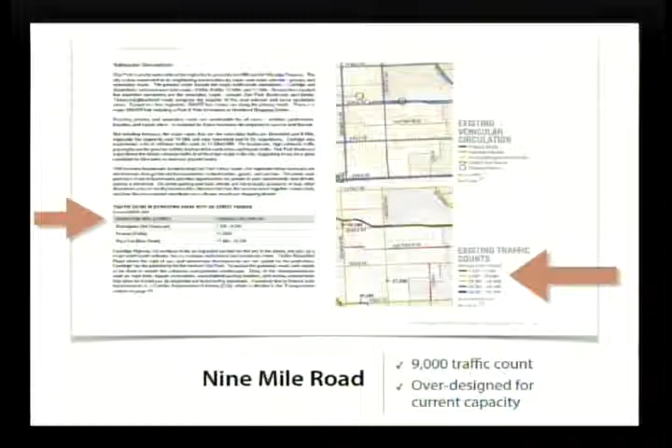So we talked a lot on the first evening about the principles of new urbanism and how you design a more democratic allocation of that public space, by bringing bikes and people in more, creating more space for stormwater and nature, and that seemed to resonate with people.

So our recommendations then, I'm going to go through some of them and then hand it over to Ken. First, in order to understand the recommendations, we felt we needed to understand the different character areas of 9 Mile. From the end, from Greenfield to the western edge at Ferndale, we identified 5 distinctly different character areas. It's even more complicated a little bit because in some areas there will be one character area on the north and another character area on the south, and each of these demands some unique solutions.

So let me just go through the 5 areas one by one and what our recommendations are for those. In character area 1, which both predominates at the eastern and western ends of 9 Mile and is the largest single character area of 9 Mile, it's mostly single-family residences facing the street.

They can be attached. Many of those are duplexes, and some are 2-story buildings. They have driveways that open onto 9 Mile, so there's potentially a lot of conflicts that could occur between cyclists and drivers coming in and out of the driveways. So we're very mindful of that as we're designing the bike facility.

An example of this character area number 1 is the area between Radcliffe and Church. Here you can see on the north side some of the driveways, and the character is predominantly residential facing 9 Mile.

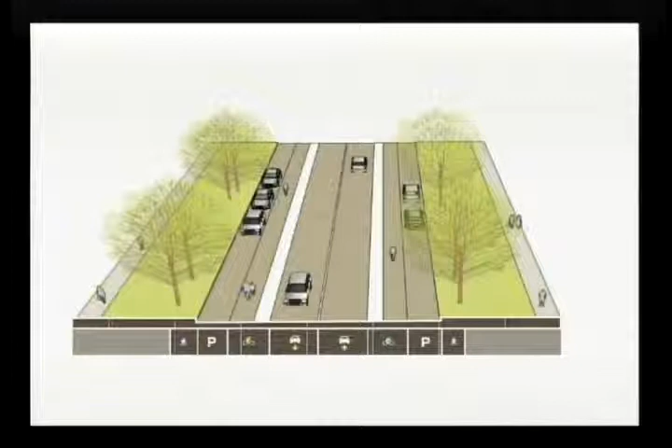This is one option, and another option would be to not have the on-street parking, but rather have a green median instead. These are two very different options - one would be much more residential, perhaps more park-like and pastoral, whereas the other would provide needed on-street parking for the residences. So we leave you with these two options to consider.

Character area number 2 has strip shopping centers on one side of the street, occurring more on the north side. These are low 1-story buildings, very viable retail buildings. Most have alleys and service access at the rear. They're very similar to buildings in Ferndale in terms of depth, vintage, and stock construction type, so there's really nothing preventing these from becoming very viable retail in the future.

But retail usually needs on-street parking to make it viable, so we looked closely at how that could be accommodated in these areas along with the bike lane. A typical character area number 2 would be Rosewood to Republic at the eastern end of 9 Mile. Here's an example of that 1-story retail and the parking.

We noticed that in some areas parking had been carved out from the curb and back, but our plans did not rely on that technique to get on-street parking. We were trying to find a way to get on-street parking within the curb-to-curb area. Here's another area where quite a bit of these businesses have on-site parking, but not all of them do.

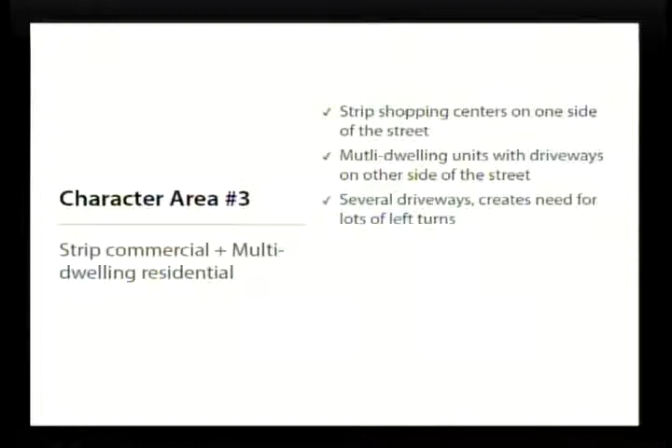In character area number 3, we have strip commercial and multi-dwelling residential. This is kind of a combination of the residential that might need visitor parking and the strip shopping centers that need parking to become more viable. There are a lot of driveways in this area, which creates a need for a lot of left turns, so I want to plant the idea that the median can be very useful for allowing left turns into driveways. The trade-offs become a little bit more complicated.

An example here at the eastern edge of 9 Mile where that multi-dwelling residential and strip commercial exist side by side. Some of that residential on the left could benefit from on-street parking, and some of the strip commercial further down could benefit from on-street parking. But as we pointed out earlier, if you did that, you would need to do away with the median. The planted median makes it easier for cars to turn into a driveway.

Here's an example of some of the commercial that has parking in front. I want to point out again the alleys at the rear, which make it easier for these businesses to get services, garbage, and deliveries off the alley. That is really great for commercial of this type.

Another character area was where the linear park exists, or what people called the linear park. During the public workshop, someone said this would be a great area for a dog walking park. So we've looked at this as a location where the buffered bike lane, rather than being on the street, could actually be incorporated along with the path. The path would be made wider, a multi-use path with pedestrians and bicyclists using it together in both directions, possibly.

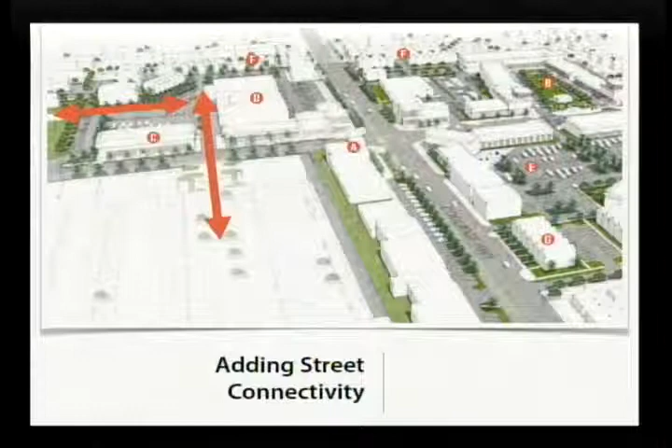We took this idea a little further and looked at what would happen if you had that new street coming down at Ridgedale. This drawing shows this new section between Ridgedale and Coolidge Highway on the right, Ridgedale on the left, and how you might be able to create public space in the middle of the street by pushing the buffered bike lane and the on-street parking to the edge.

You'd still have a very adequate sidewalk. This is designed with a 15-foot sidewalk, and the buffered bike lane and the on-street parking, and it has a left turn lane. But the area between the left turn lanes is about a 38-foot wide spot for a range of uses that might include rainwater gardens, public plaza, pocket park.

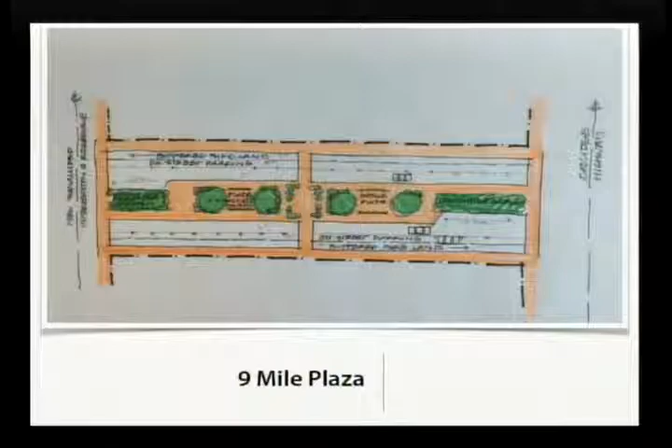This could be a place where community gatherings occurred. And we looked at some examples around the country where similar things are being done.

One great example is Lancaster Boulevard in California. You can see how this street was transformed to one lane in each direction. They use the space off to the left, what would be the equivalent of the plaza space that we're proposing, part of the time for diagonal parking, and the rest of the time for festivals, weekends, and evenings. So it's a multi-use space, a very creative use of space.

Now I'm going to hand it over to Ken, and he's going to talk more about specific street design from the engineer's perspective.

Thank you, Marcy. My name is Ken Voigt, a traffic engineer working on this project with Marcy. A lot of the concepts we talked about require some engineering detail to check their feasibility and safety, and I'd like to talk about it. There are some documents showing the latest state-of-the-art in street design for urban areas, to create great places and still accommodate pedestrians, bicycles, people and cars.

One of the things Marcy mentioned for Coolidge and 9 Mile is the possibility of a roundabout. I've heard lots of concerns about roundabouts, and I'm not quite sure why—I understand it happens if it's new to you, but there's a lot to be said for roundabouts. I want to spend a little time explaining why they are so effective and such a great asset to a community.

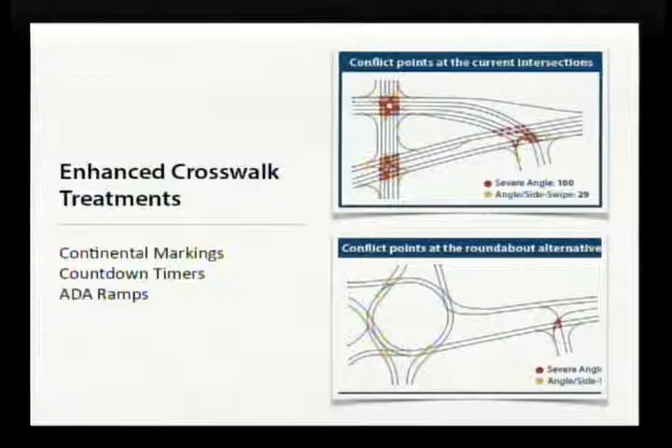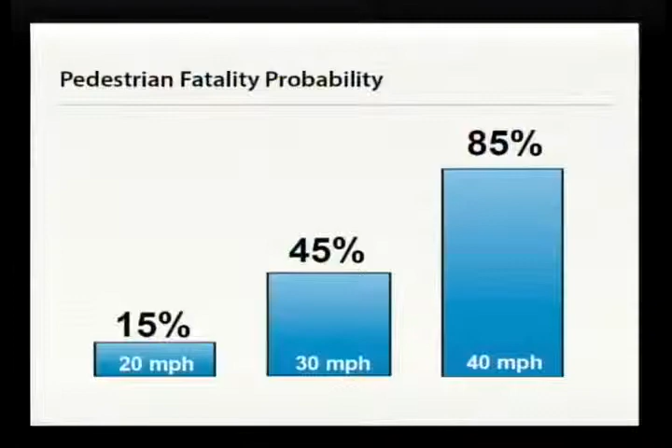If you're a pedestrian, think about this: if you're struck by a car going 20 miles per hour, there's a 15% chance that could result in a fatality. If that car is going between 30 to 40 miles per hour, there's a 45 to 85% chance that person is a fatality. What did I say a roundabout's designed for? 15 to 20 miles per hour. So you can see the impact on safety, eliminating fatalities and creating a much more pedestrian-friendly condition.

What we're looking at—I'll show you a drawing shortly—is what a roundabout might look like. We did a preliminary concept for it. We'd love to have a single lane all the way around, but there are a couple of areas because of Coolidge where it's got to be 2 lanes.

Where we have 2 lanes, the U.S. Access Board pretty much directs us to look at pedestrian push buttons to assist a pedestrian across the roadway. The nice thing about that is for a pedestrian, whether it's 1 lane or 2 lanes, oncoming traffic is going slower—you're only crossing like a one-way street because there's an island in the middle.

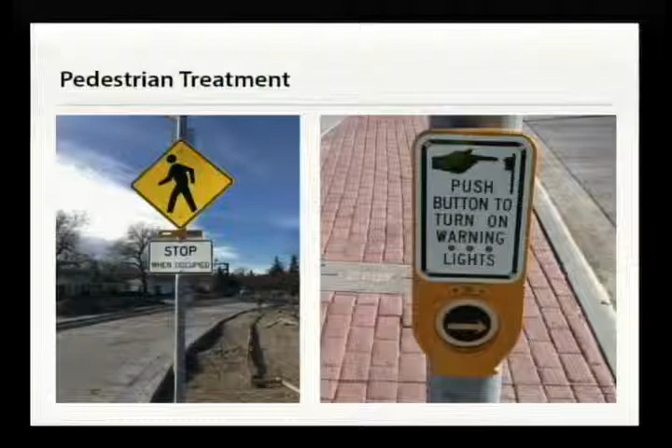So you only have to worry about traffic coming in one direction, and then you worry about the next direction as you get through the median area, or the island, if you want to call it that. And then these are rapid flashing beacons. We just installed this in the first 2-lane roundabout ever constructed in Cheyenne, Wyoming. And that was a school crossing, and it's working very, very well and very safe. There's a senior center right next to it as well.

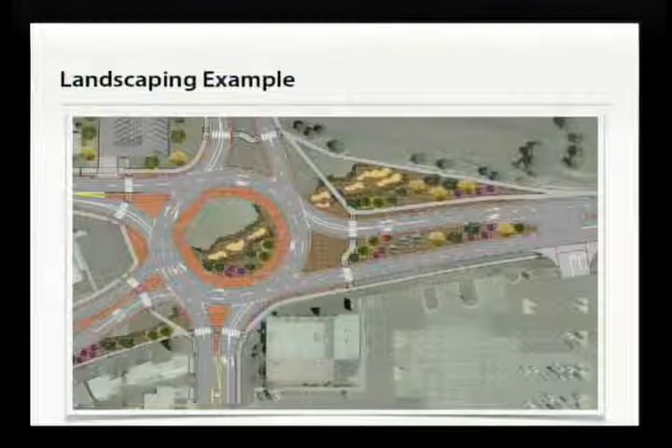I think it was mentioned by Marcy, you can do a lot of landscaping. There's different treatments, low maintenance with native grasses and plants, or sculptures and more permanent things that don't require landscape. This is a look down of the thing that we did in Cheyenne. It's a 5-legged roundabout, even more complex, and it works well.

Here's another example of an urban roundabout. You can see the pedestrian crosswalks. You can see the islands in the middle of the roadway. It forces a car to turn a little bit as you enter the roundabout, and you're merging with a gap in traffic that's going through the roadway at 15 miles per hour.

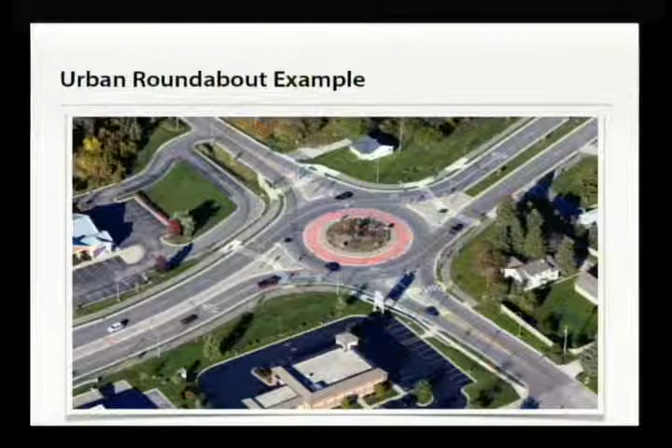This is a concept drawing without the detailed traffic data and a topographic survey, but this is approximately what a roundabout would look like at Coolidge and 9 Mile. It really minimizes the impact on adjacent right-of-way. It fits within, if you're familiar with the walls, decorative walls that are on each of the corners. It fits within that footprint and accommodates the pedestrians, and you can see the center island, as we call it, where landscaping and so on can occur.

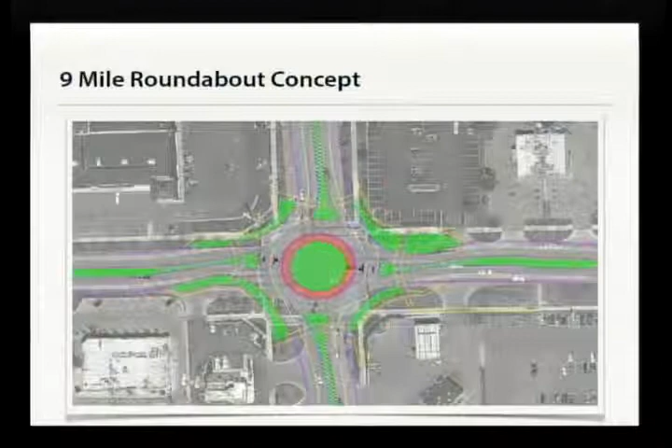So how do you drive a roundabout? Whenever you have your first roundabout, it requires an extensive education program. AARP is very supportive of these things, and they will assist you in meeting with seniors and so on, having it taught in driver's ed classes. The neat thing is, when the kids learn this, they teach their parents about it. It's kind of like a reverse learning experience. They work very well, and it's very simple.

You slow down and choose your lane, just like you would at a regular intersection. If you're gonna make a left turn or right turn, you're either in the left lane or the right lane, or if you're going through. Obviously, you're gonna yield to a pedestrian, which is required, and then prepare to enter the traffic, and you merge, you wait for a gap in traffic, and you merge with that traffic that's going in the circle, we call it. Once you're in a roundabout, the only thing you don't do is change lanes.

There'll be pavement markings that say this is for right turns and through, or this is for left turns. And there'll be a sign ahead of time: this is the lane you want for this, or this is the lane you want for that movement. And then as you exit, you yield to the pedestrian, same as you would at a regular intersection. Everybody's going slow, and you don't create crashes or safety problems.

That's what I've got on roundabouts. I'd be happy to answer additional questions about it, because I know there's people not familiar with it.

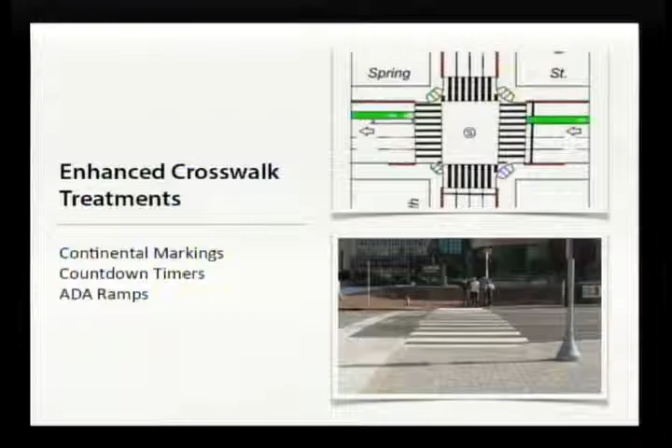Countdown timers where we've got traffic signals to be pedestrian friendly. I've seen pedestrians when it goes from walk to flashing don't walk, get halfway across and turn around and go back the other way. This tells you you've got 10 seconds left, 9 seconds left, 8 seconds left, and people continue crossing and don't get anxious about it.

And then to upgrade the ADA ramps for wheelchairs and so on, so that they're not tilted and they meet the design standards. There's a fine line between an adequate ADA ramp and a ramp that's really a problem for folks in wheelchairs. So those are some of the enhancements.

Why do you have to walk all the way around to get where you're going? You should have a crosswalk on both sides. That's what the pedestrian expects, and that's what the motorist expects. You're enhancing the pedestrian safety and experience there.